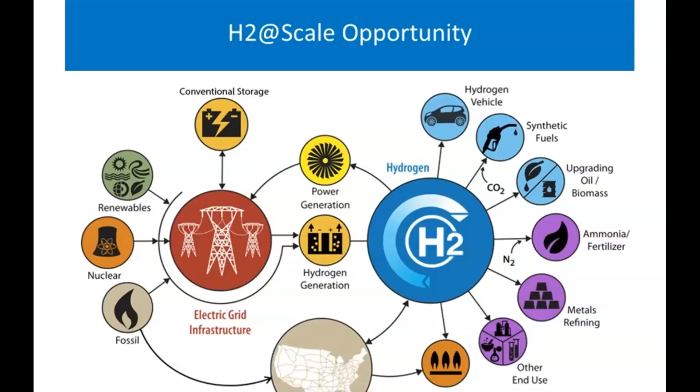So usually after I show this kind of vision, what I like to do is I like to talk about the attributes. And what's really becoming clear is that this cross-sectoral and cross-temporal ability of hydrogen to store and move energy is becoming really critical. But also hydrogen's critical because of how clean and efficient it is in its end use. So both of those things together are huge attributes of how hydrogen fits. And why, if you're only looking at one area, like if you're only looking at the grid or you're only looking at transportation, you don't always come to hydrogen as being a critical piece of it.

When you look energy system wide, hydrogen has much larger benefits. And those benefits include things like economy. There's a lot of jobs and GDP impacts. Also, because you're dealing with local renewable resources oftentimes, there's an enhanced energy security. But really, a lot of times it is these environmental benefits that are the main drivers. And from my perspective, getting all of these benefits in a single energy system is an increased value proposition as well.

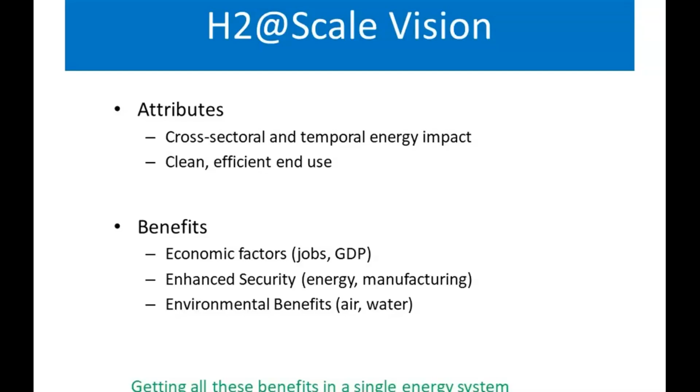This is starting to become really well seen across the globe. You can see things like a hydrogen roadmap for Europe or for Japan. The US has one. I'll talk a little bit about the Hydrogen Council, but basically this cross-sector coupling and the need for clean energy is a big driver for where hydrogen fits. And the economics have been changing so that the differential cost for being able to do this has become less and less as time's gone by.

The Hydrogen Council is one of the most important entities for championing hydrogen, and so I like to talk about them a lot. It was started only really 3+ years ago by 13 members, and the companies that are on this list are all going to be well known to everybody on the call. And you can see that today it's gone from 13 up to 52, today 92 members, all kind of Fortune 500 types of companies, all included in the energy system, a lot of the big oil and gas companies.

And in 2017, they came out with a roadmap that was across the planet that basically said by 2050, they predicted 2.5 trillion in global revenues, 30 million jobs, and 18% of all total global energy demand would be connected to hydrogen.

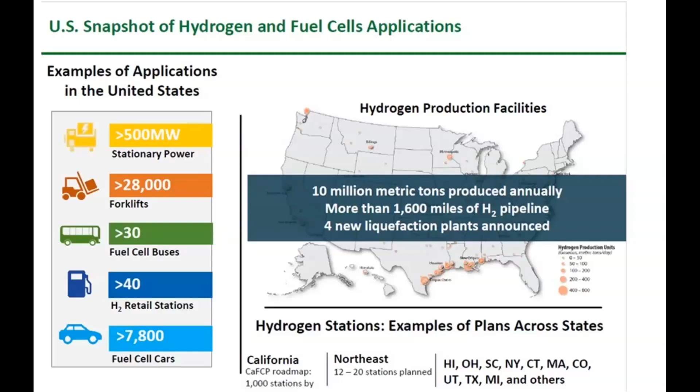In the US, you can see how hydrogen's changing as well. There's over 0.5 gigawatt of stationary power. If you run a distribution center for Walmart or for Amazon, you run it on fuel cell powered forklifts powered by hydrogen. There's buses. There's almost 10,000 cars in California, and there's big pushes to do things that light duty vehicles powered by batteries can't do well in the heavy duty transportation space, because of the increased energy density, because of refueling times versus recharging times. And so hydrogen exists today, it's growing more and more, and that's not changing as we go towards the future.

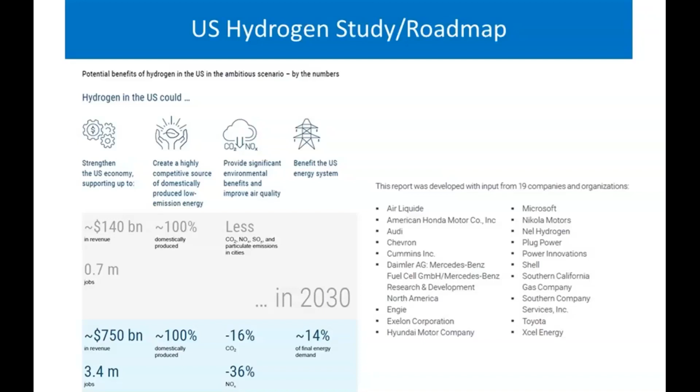This past November, there was a US hydrogen study and roadmap that came out, and again, a number of these companies are associated with the Hydrogen Council. They basically said in the US, it's going to be $750 billion in revenue and 14% of US energy by 2050. This is because the economics of energy aren't balanced across the planet, but it's very consistent with the global study done by the Hydrogen Council. So the scale of what we expect hydrogen to become in the future is really large. And it's not just academics or national labs talking about it. It really is these major industries recognizing what's going on in this space as well.

At NREL, we're trying to understand what the future might look like and also how to enable it. So here we can see what we project 2050 levels of hydrogen use to be. This report actually came out last night just in time for Hydrogen Day today, and I'd be happy to provide a web link to this. We talk about how hydrogen, regardless of the different scenarios, is going to become more prevalent in society. And if we can enable low-cost electrolysis, it'll be much more enabled, and it will also be made in a more green process. These are only economic arguments, without any policy or societal drivers. So even just from an economic perspective, hydrogen is going to be used more, and I can talk more about why that is.

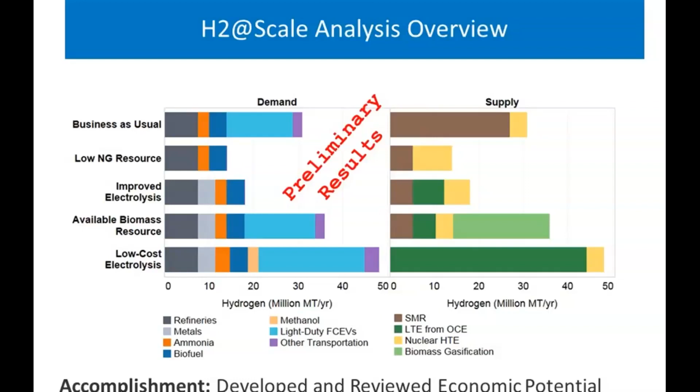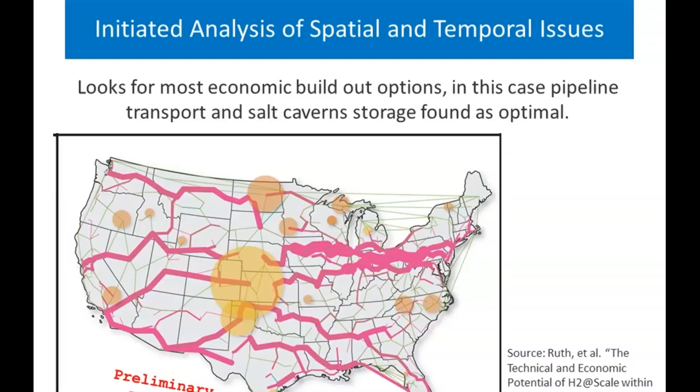And we also look at how you would move this energy around. This is one of the maps that I love. It talks about the great wind resource we have in the center of the country, and how if we build hydrogen pipelines, we can take that hydrogen out to the coasts where most of the energy in our country is consumed, and economically distribute that hydrogen and that wind energy from the center of the country to drive the economy in the outer parts. There's a lot more detail in some of these reports that would follow up for the attendees.

But a lot of it does come down to how expensive it is to move energy. So this is basically the cost to move a megawatt hour of energy 1,000 miles. And what you can see is that electricity lines, they are very expensive to move energy, and they also are limited in that they don't have any storage capacity.

You compare this to oil pipelines, which is a really dense form of fuel, ethanol or methanol, which are slightly less dense liquid fuels, and then natural gas and hydrogen. They're both much cheaper than electricity.

Hydrogen has some incremental cost increases compared to natural gas, but it's not very far off in terms of a distribution cost. It's just that this is projecting an infrastructure that we spent all of the money on to allow the natural gas to be stored and transported, whereas hydrogen doesn't have that. So if we look towards the future, we can move hydrogen almost as economically on an energy basis as we can move natural gas today.

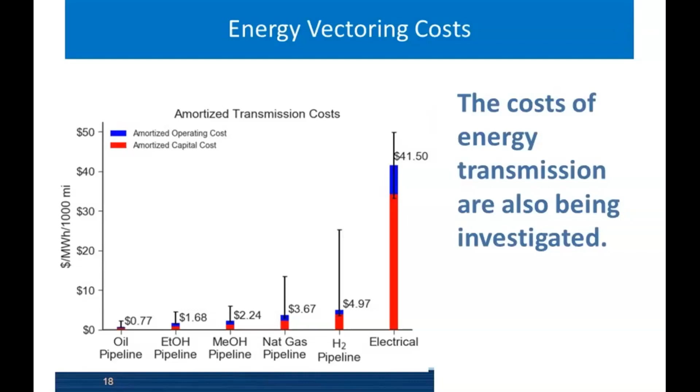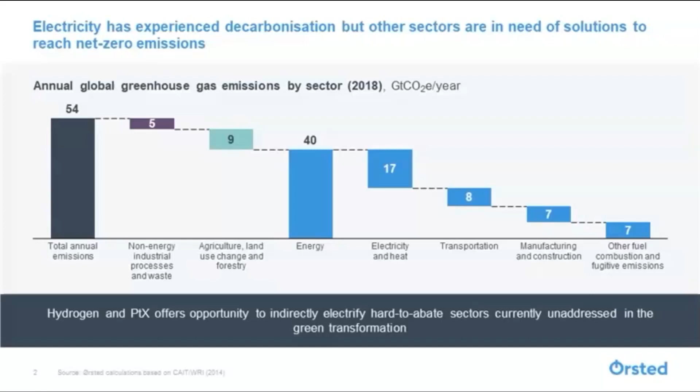And it's really within this area that we believe in Ørsted that hydrogen and power-to-X applications more generally have a role to play, because they give us the opportunity to indirectly electrify these so-called hard-to-abate sectors that have really been untouched in the green transformation. As said, we previously came from a very oil and gas heavy industry, but had transformed into a pure play renewables company, mostly focused on offshore wind, but also have a position within solar PV and onshore.

With regards to hydrogen, we think that there's a really good match between offshore wind and electrolysis for three reasons, basically. The first one is scale. So currently the biggest offshore wind farms being commissioned are bigger than 1 gigawatt in the Lego building blocks, if you will, that we're constructing them in. And that's important if you're looking at applications like new ways of producing steel or refineries where you would need very big electricity sources to serve those demands if they are to change to renewable hydrogen.

Secondly, you have the capacity factor. The overall, you could say, headline of today's session is about flexibility requirements. And while there will definitely be intermittency within offshore wind generation as well, on a macro scale you have the electricity available a lot of the time. So this graph says 43, but on some of the good sites, you actually have capacity factors in excess of 50%. So that actually matches quite well with somewhat baseload generation, if you will. So that, together with the cost of electricity, of course, results in your levelized cost of hydrogen.

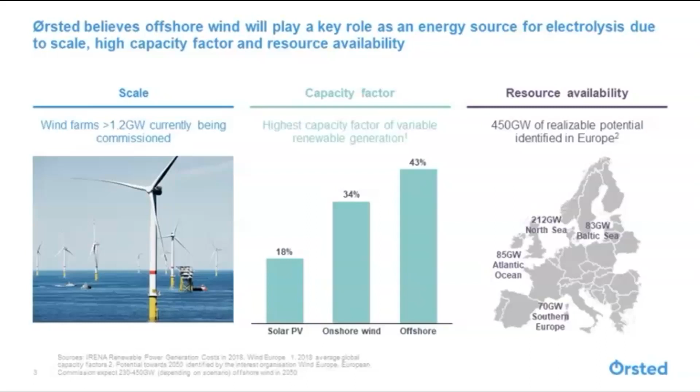Basically, hydrogen can be used for almost everything, but our belief is that industry applications and heavy-duty transport really are the most promising ones. And the key reason for that is that there are few alternatives to producing steel or producing ammonia going forward if the premise is that we need to reach net zero emissions by some date. Quite frankly, there's not enough biomass resources available to really address the energy needs of some of these sectors. So if you look at it from a resource potential, then hydrogen and PtX seem like the technologies that you need to choose.

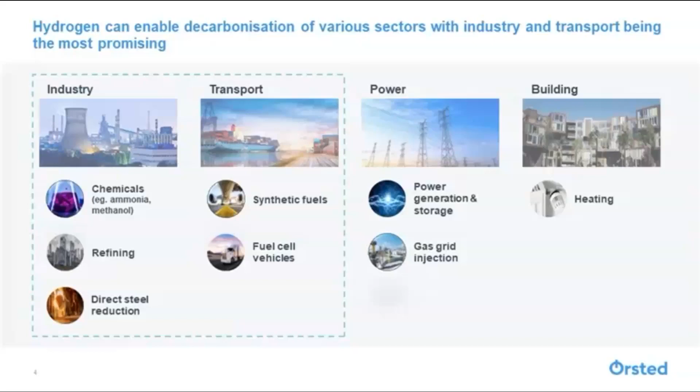You could use it for turning electricity into hydrogen for the sake of heating buildings. Our view is that there are better and cheaper alternatives, such as heat pumps, that one should use instead. Rather do electrification directly, if possible, rather than go through intricate solutions like hydrogen for those sectors. But even so, there's still an enormous potential for hydrogen and PtX.

That was the same rationale that we basically took when developing the Green Fuels for Denmark project. That was basically launched in response to Denmark coming out with a binding emission reduction target of 70% by 2030. So the project consortium members basically took a look at that and said, well, given the situation of Denmark, where there's not a lot of heavy industry, almost none, what levers do we need to make use of in order to get to a 70% reduction by 2030?

And taking a look at that, we came to the conclusion you can actually go very far with known means: heat pumps, battery electric vehicles, a bit of biofuel blending, etc. But even so, if you implemented all those in a very bullish scenario, you'd still be left with a residual that you needed to address, where it would be meaningful to address it through PtX. And if you look even further beyond 2030, the rationale for PtX becomes even stronger in a Danish context.

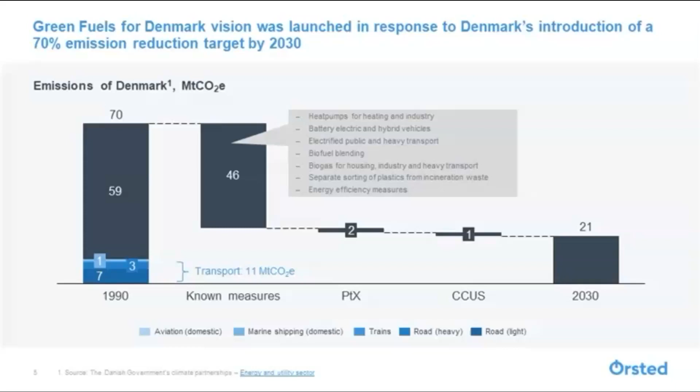Basically, the intention is, over 3 phases, to develop a facility with an electrolyzer input of 1.3 gigawatts of electricity that will produce roughly 30% of the fuel quantity used in the Copenhagen airport. And secondly, it will have an outlet of fuel for the marine shipping sector, and also for heavy duty road transport in the greater Copenhagen area. So for road transport, it's going to be pure hydrogen for fuel cell based transport. For the marine shipping, it's likely going to be methanol, and for aviation, it's going to be a synthetic kerosene.

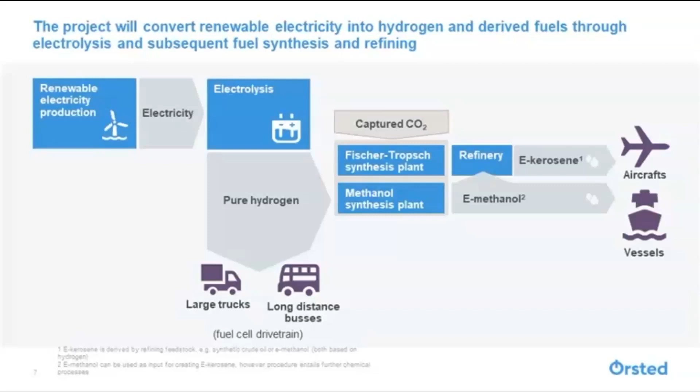I would end by saying, well, while we're very keen on the project, we are not quite there yet. So it's a bit like building a car while driving it. So in order to really make this happen, we're in parallel working on improving the framework conditions, both on the production side, but also on the fuel offtake side. So currently, there are no strong incentives on the fuel consumption side, but it's key basically that the offtake demand is stimulated in order for this transition from fossil to green to happen. And with that, I'm going to hand it over to the next speaker.

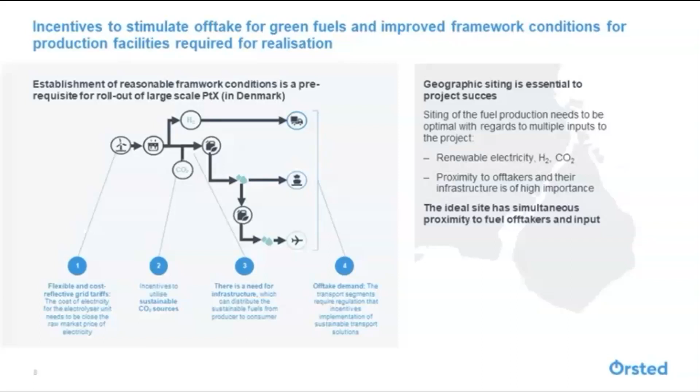Yeah, look, I guess by way of introduction, and I think hopefully we're on the journey, if you like, from the broader sense down to something relatively narrow. So I'm going to talk about an isolated project, and I think the key for all of you and the roles you hold is to consider the implications, I guess, of the kinds of changes you'll see out there in the manufacturing sector, where significant energy consumers are going down a pathway that's quite significantly different to where we've been going for a century plus, and the impacts of that.

So some of the particularly relevant aspects of what we've heard already today include Bryan's slide on hydrogen at scale. Particularly relevant there is some of the things we'll see around the cross-sector aspects of what we're doing. Our journey also is reflective of the electrolysis cost pathway that Bryan discussed, and something that Michael just mentioned around the geographic siting I think is so critical.

So I guess we'll jump down to a fairly specific example of what you're seeing and the implications. I'll step through fairly quickly here, just in case my American friends aren't actually fully aware of Yara. We were just a part of the great Norsk Hydro conglomerate, if you like, until a few years ago, with over a century of operations. And being from Norway, our major shareholder, at around 40%, is the Norwegian government. So our actions to some extent are reflective of the broader European/Scandinavian discussions around power, renewables, etc.

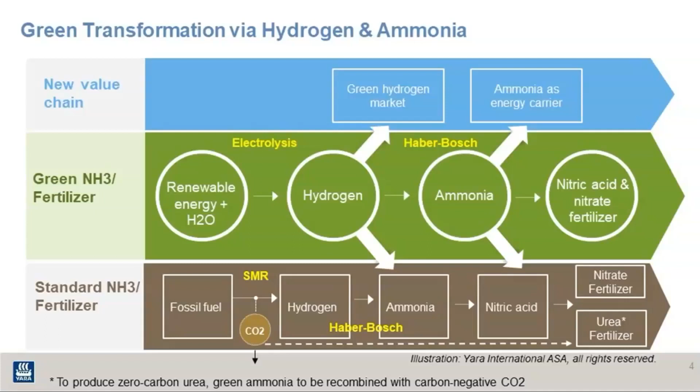This slide is one we recently presented in Japan to a major conference, and the key point here to look at is for power generation. Japan has a stated ambition around 2030 to effectively flip their economy to hydrogen-based, and that was going to be a major trumpeting, if you like, of the Olympics that were to be held this year. So we'll have to carry that over to 2021.

But what you're looking at for a country like Australia, that's already a very, very big energy exporter to Japan, largely through LNG, is that by 2030, Japan won't have any interest in our LNG anymore. It'll be looking for green hydrogen. And so that quite clearly gives us some interest in new markets, etc.

And so one of the early starting points, there's a major green ammonia consortium in Japan, would be looking at renewably generated ammonia from northwestern Australia being utilised in Japan for power generation. So again, the hydrogen role there is indirectly going into direct combustion ammonia in the power stations which are currently burning coal, etc. So again, hydrogen is a significant element of the future power generation in Japan.

There's also the pursuit of regasification, and there's all sorts of discussions around the various energy loss, etc. But this, again, as I mentioned, is where ammonia is cracked. The hydrogen is shipped as a component of ammonia. That's then cracked at the other end, just like an LNG regasification terminal. And the nitrogen can obviously be emitted into air. And so you effectively ship the renewably generated hydrogen from northwest Australia into the Japanese power sector. So that's a key focus for many within the Australian government and private sector.

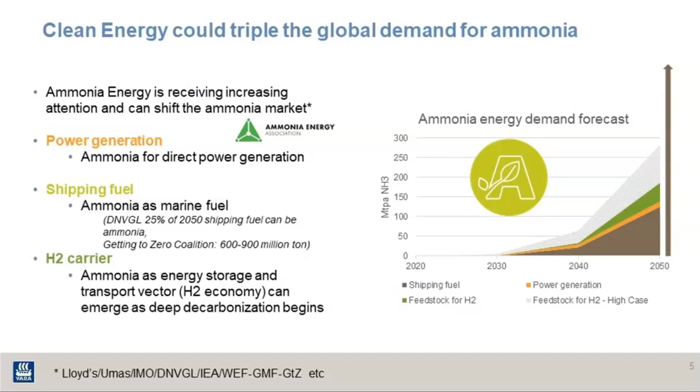Just to give you the context of where we operate, and as I said, this project to some extent represents a very isolated example. So you may at first be thinking there's not a lot of relevance to the power transmission sector, etc. But what you'll see is even in the most isolated part of the world, the pursuit of renewable hydrogen is potentially impacting the energy sector in Western Australia significantly.

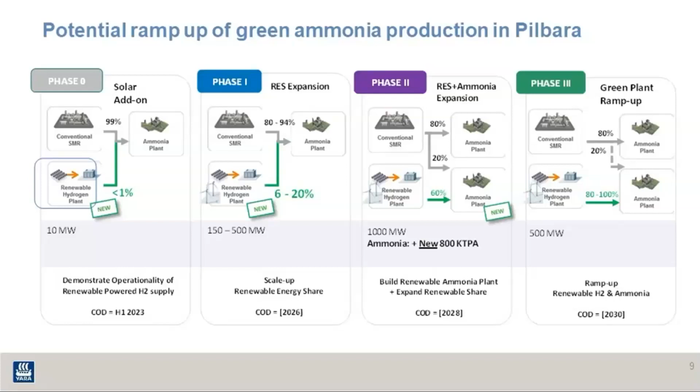It's also worth noting, as I mentioned, that the 2030 timeframe for major renewables production here in Western Australia roughly aligns with Japan's timeframe for major changeover to green hydrogen. And I think that's one of the interesting elements, as you'd be aware, in the hydrocarbon space. There's a lot of interest from various players. ExxonMobil's been mentioned. BP has taken significant steps. They're seeking to decarbonise their operations, which is almost an oxymoron.

But our local major independent producer, for instance, Woodside, is pursuing 2 renewable hydrogen projects and talking about ammonia export, despite never having produced a molecule of hydrogen or ammonia in its 50-year history. And so people and entities in the private sector are piling in with excitement to this area. And so the implications, I think, will be significant.

Just to mention this, I think it's important because Australia's justifiably seen as not exactly leading the debate around renewables. We're one of the most per capita intensive emitters in the world, and yet, even in Australia, we've developed a fairly significant national hydrogen strategy developed by the CSIRO, and importantly, that was developed by the Council of Australian Governments, which represents all states and the Commonwealth, meaning that you've got effectively a unified national approach to how we'll approach hydrogen entering our energy sector and everything else.

We also have in Western Australia, given our pretty extreme isolation, our own renewable hydrogen strategy, which sets out some specific export aspirations, etc. And just the final slide I'll flick to, and I guess this brings it all together. There's a mix of proposals in here of various levels of maturity.

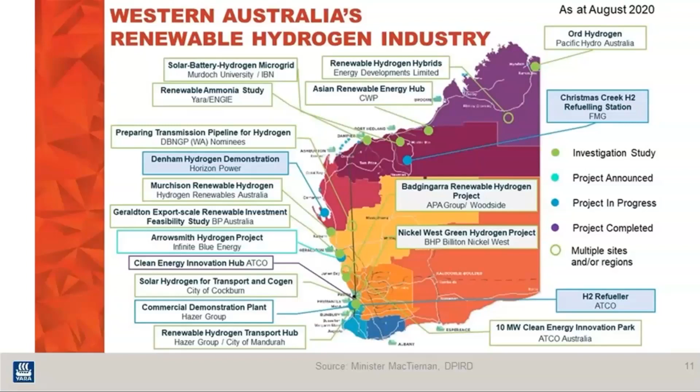And I'll pull up the Slido. A lot of questions. I think we've got about 15 to 16, but certainly about 15 minutes to go. So we're not going to be able to get to everyone, but let's go down by the popularity here. The first one is actually not addressed to anyone in particular. Maybe we can kick this off to Bryan or perhaps Michael.

Can the electrolyzer provide ancillary services by quickly turning on and off, ramping up and down? In other words, what are the benefits that can be gained in terms of flexibility from the latest electrolyzer technology? Great. Yeah, go ahead. Basically, ancillary services are very simple for electrolyzers to take on. We have a system that's been integrated, and a lot of different ways show that they provide basically a spinning reserve, and typically throttling up and throttling down happen at rates that match the energy system's needs.

So it's not exactly clear how much stress that puts on the electrolysis system and whether or not you'd want to mitigate those times, but they will provide dispatchable services as well. Typically, the economics of doing so aren't as valuable as the other economics of the hydrogen, the value of the hydrogen produced, but it is another value stream that they provide.

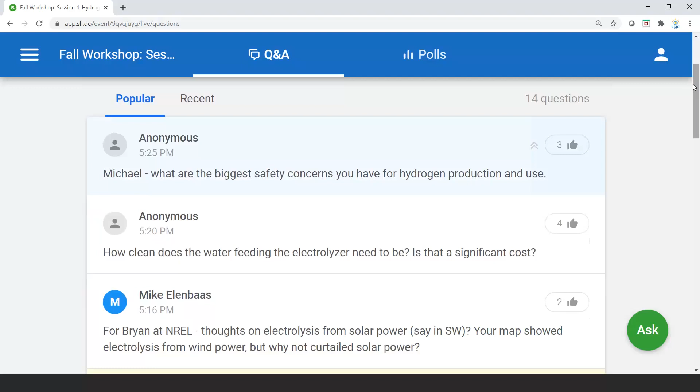Okay, yeah, thank you, Michael. The next question, I'd like to get one in here for Luke as well. We've got one actually addressed to Michael and Luke. Maybe we'll start with Luke first. How much loss of efficiency and additional cost is there in producing products like ammonia and syngas? I apologize. We lost our feed here, but we'll start with Luke and then transition to Michael.

Look, I don't have specific figures to put up for the question directly, but I think the key to focus on here is this, if you like, precipitous drop in the price of the electrons, and so particularly in our area, there is no question that the large scale availability of the renewables makes these issues less and less of a concern. And some of the other entities we're having discussions with quite clearly see a premium, particularly in these early stages, to catalyse the market, a premium willing to be paid.

So whilst we need to factor in those extra costs, the markets that need to effectively decarbonise due to government policy, etc., are willing to pay above. And that's what's being pursued in the next few years. But as I say, with the availability of large amounts of cheap renewable power in locations such as ours, that additional cost becomes less important than the capital cost of the projects that we're getting up.

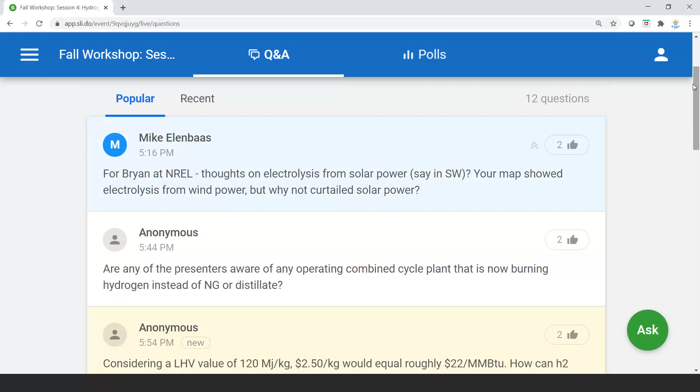Time for one more. The next one on the list is not addressed to anybody; it's to all the panelists. Are any of the presenters aware of any operating combined cycle power plant that is now burning hydrogen instead of natural gas or distillate? Okay, I think that's a short answer. If no one wants to take it, I think the answer is that the presenters aren't aware of any.

Go ahead. I'm not, but I would say that they are starting to burn blends, and every major turbine manufacturer is looking to go for 100% pure hydrogen as well as mixed blends. So there are a number of new projects. One is in Utah, where there are salt domes to put the hydrogen into, where they're blending hydrogen and natural gas. So the first step is these blends, which Luke talked about at some level, and then the next step might be more direct hydrogen.

Great, thanks. I appreciate that, Bryan. I guess we're wrapping up the hour. Maybe one more very quick question, and I'd like to hand that to Luke because we haven't heard as much from Luke yet. Luke, could you quickly explain why ammonia and not synthetic gas in your presentation?

Sure. The key thing here, like everything, is you don't want significant alterations to existing capital investments. Ammonia is a product that we know and ship and is safe, and we're utilising that on a daily basis, exporting hundreds of thousands of tonnes a year. So from a relatively conservative stepwise change, ammonia is the product we're most comfortable with, which goes to a whole range of issues, including safety, the fact that there's an existing market, existing consumption, etc.